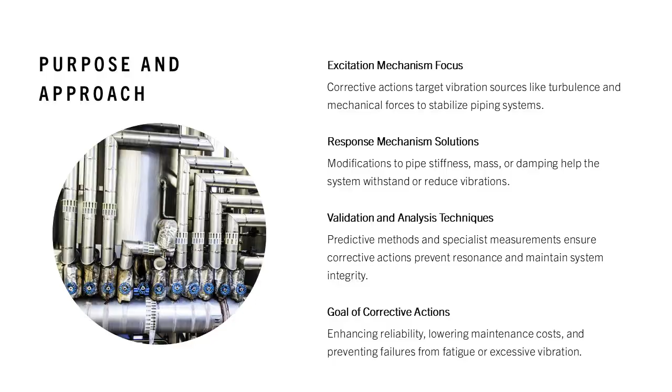These analyses ensure that modifications do not inadvertently introduce new resonance issues or compromise system integrity. In complex systems, multiple excitation mechanisms may coexist, necessitating comprehensive solutions that address all contributing factors. Ultimately, the goal of these corrective actions is to enhance reliability, reduce maintenance costs, and prevent catastrophic failures caused by fatigue or excessive vibration. General pipework corrective actions, support adjustments and contact prevention.

General corrective actions for pipework focus on improving structural support and preventing harmful contact. Tightening clearances on existing supports is a common method to increase pipe stiffness and raise its natural frequency, thereby reducing vibration levels. This approach works because energy levels typically decrease as frequency increases, making the system less susceptible to resonance. However, thermal expansion must be considered to avoid overstressing the pipe during temperature changes.

Another critical measure is avoiding metal-to-metal contact between moving pipe sections and structural elements, which can lead to fretting damage. If contact is unavoidable, inserting wear-resistant or compliant materials between surfaces can mitigate wear. Alternatively, redesigning supports to eliminate contact points is recommended. These actions not only reduce vibration but also extend the lifespan of the pipework by preventing localized damage.

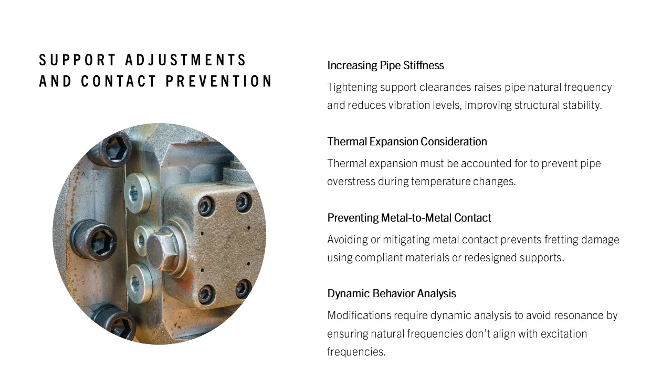Care must be taken when altering support stiffness, as changes can inadvertently align structural natural frequencies with excitation frequencies, creating resonance conditions. Therefore, any modification should be preceded by a thorough analysis of the system's dynamic behavior.

Flow-induced turbulence, excitation control, response modifications. Flow-induced turbulence is a major source of excitation energy in piping systems. Reducing fluid velocity is one of the simplest and most effective solutions, achievable by increasing pipe diameter, adding parallel lines, or adjusting operating conditions. Lower velocities reduce turbulence intensity, thereby minimizing vibration.

Flow smoothing techniques, such as using swept tees instead of 90° tees, minimizing bends, and incorporating long radius bends, further reduce turbulence. Flow straighteners can also be installed to stabilize fluid movement. Valve selection plays a critical role. High recovery valves with streamlined internal contours dissipate less energy, reducing downstream turbulence. Examples include rotary control valves like eccentric plug, butterfly, and ball valves.

Additionally, changing valve trim can help control kinetic energy at the trim exit, ensuring it remains within safe limits for continuous or multiphase flows. These measures collectively aim to reduce excitation energy at its source, preventing excessive vibration and prolonging system life. Let's see this diagram on the left.

This diagram shows how turbulent kinetic energy is distributed across different frequencies, illustrating that most of the energy in a turbulent flow is concentrated at very low frequencies. As we move to the right along the frequency axis, the energy drops rapidly, starting from very high values near 10,000 and decaying in a steep downward trend. The oscillations we see in the mid-frequency range represent the presence of coherent eddies and fluctuating flow structures, but overall, the curve continues to taper off smoothly.

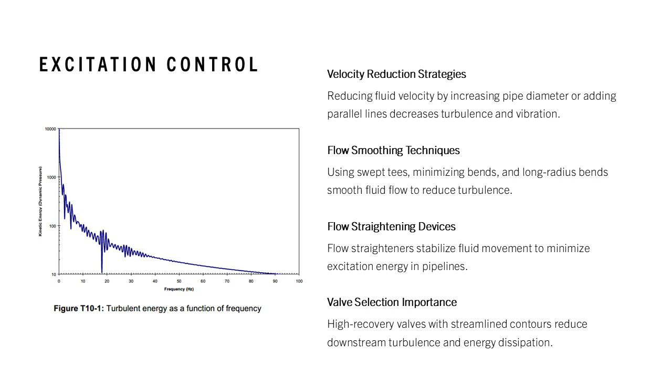When excitation cannot be sufficiently reduced, response-based solutions are applied. Increasing support stiffness raises the pipe's natural frequency, reducing its susceptibility to turbulence-induced vibration. However, thermal growth constraints may limit additional supports. In such cases, viscous dampers provide effective damping across a range of frequencies while allowing thermal movement. Unlike conventional snubbers, these dampers are designed for dynamic vibration control and require specialist advice for proper installation.

Shock arrestors can also be used to resist sudden movements caused by forced vibration, though they require regular maintenance to ensure functionality. Composite pipe wraps offer increased stiffness and damping but should be used cautiously due to limited knowledge of their long-term fatigue resistance. Increasing pipe wall thickness is another option, as it enhances structural inertance and reduces dynamic stress levels. These measures collectively strengthen the pipework's ability to withstand excitation forces, ensuring operational stability.

Let's see this diagram. This diagram compares the vibration response of the pipework before and after a viscous damper was installed, showing a dramatic reduction in velocity across the dominant frequencies. The blue curve represents the system without a damper, where we see a strong resonance peak near 3 Hz reaching over 20 mm per second RMS, indicating significant vibration.

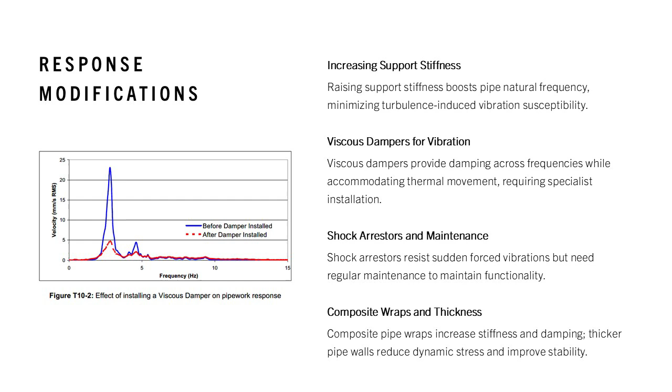After the damper is installed, shown by the red dashed line, the peak at this frequency is substantially suppressed to below 5 mm per second, and similar reductions occur at the smaller peaks around 4 to 6 Hz. Across the entire frequency range up to 15 Hz, the damper effectively lowers the vibration amplitude, demonstrating how the added damping dissipates energy and stabilizes the pipework response. Overall, this figure clearly illustrates the damper's role in mitigating resonance and improving system reliability.

Managing mechanical excitation, response tuning techniques. Mechanical excitation often arises from rotating machinery or connected equipment. One effective corrective action is changing the operating speed of machinery to avoid resonance with pipework natural frequencies. This adjustment must be carefully analyzed to prevent introducing new resonance conditions.

Isolation mounts are another solution, decoupling vibration sources from the rest of the system. These mounts are most effective when installed during the design stage and require a stiff foundation to function properly. Bellows can also be used to break vibration transmission paths, though they introduce additional considerations such as pressure drops and potential turbulence. Each of these measures aims to reduce the transmission of mechanical energy into the piping system, thereby minimizing vibration and associated fatigue risks.

Let's see this diagram. This diagram illustrates how a pipe's fundamental natural frequency changes with both its span length and outside diameter. As shown by the shaded bands, longer spans tend to lower the natural frequency, while increasing the pipe's outside diameter raises its stiffness and therefore increases the natural frequency. For example, pipes with long spans in the upper shaded region fall near 1 Hz, indicating they are more flexible and susceptible to low-frequency excitation.

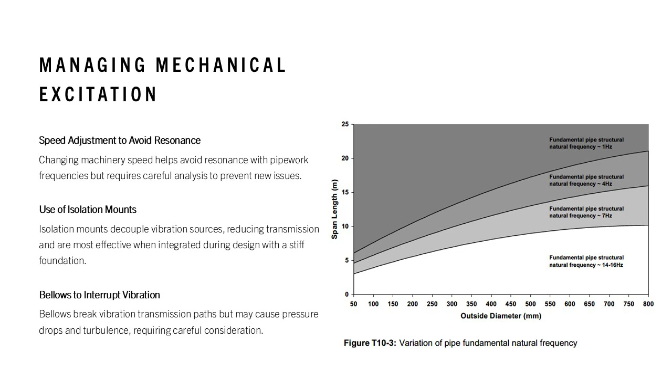Response tuning involves altering pipework characteristics to shift natural frequencies away from excitation sources. This can be achieved by adding stiffness or mass to the pipe, depending on whether the goal is to raise or lower the natural frequency. For example, clamps or additional supports increase stiffness, while added mass lowers frequency. Modifying span length or pipe diameter also influences natural frequencies significantly.

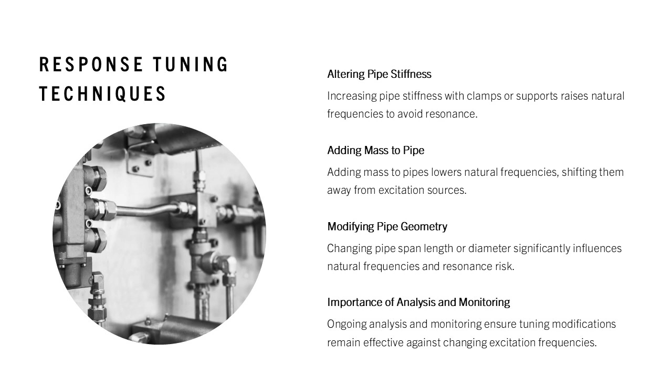These changes must be carefully planned to avoid coinciding with harmonic excitation frequencies, which could create new resonance issues. In systems with variable excitation frequencies, caution is essential, as operational changes may reintroduce resonance. Proper analysis and monitoring are critical to ensure long-term effectiveness of these modifications.

Pulsation and acoustic issues, reciprocating equipment pulsation, high-frequency acoustic excitation. Reciprocating pumps and compressors generate pulsations that can excite acoustic resonances in piping systems. To mitigate this, operating speeds should avoid coincidence with acoustic natural frequencies, typically by maintaining a plus or minus 20% separation. Adjusting line length can also shift acoustic modes, reducing resonance risk.

Pulsation bottles and nitrogen precharged dampers are commonly used to attenuate pressure fluctuations, though their effectiveness depends on proper design and maintenance. Orifice plates and acoustic absorbers, such as tuned side branches, provide additional damping for specific frequencies. These measures aim to control pulsation energy and prevent excessive vibration in connected pipework.

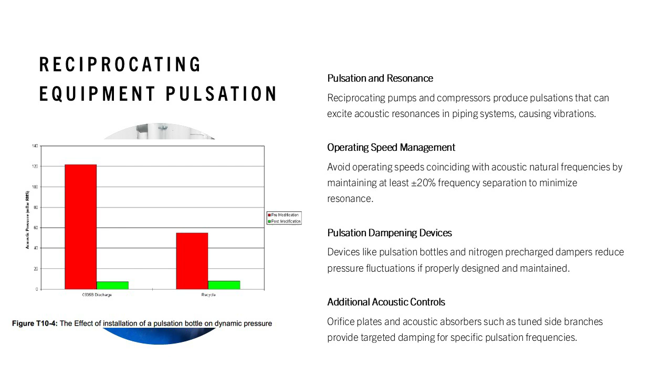High-frequency acoustic excitation poses a significant fatigue risk, particularly at circumferential discontinuities. Reducing mass flow rate or outlet Mach number can lower acoustic energy at its source. Using low-noise valve trims, such as multi-stage pressure drop designs, further mitigates noise generation. Increasing downstream pipe length provides natural attenuation, reducing energy levels before reaching sensitive locations.

Structural modifications, including increasing wall thickness, removing discontinuities, and adding stiffening rings, enhance resistance to high-frequency stresses. These actions collectively reduce the likelihood of acoustic fatigue failures and improve system durability.

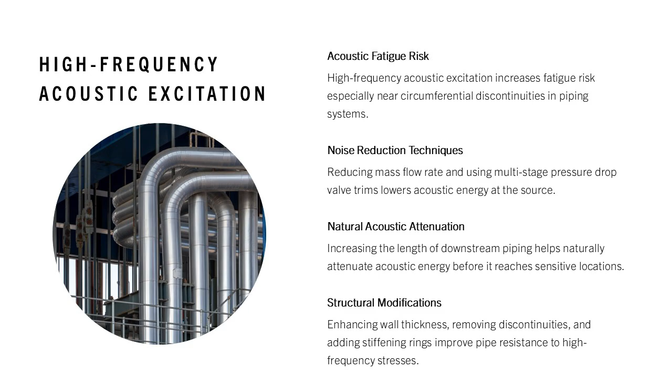Surge control, cavitation and flashing mitigation. Surge events occur during rapid valve operations or pump startup/shutdown, causing sudden changes in fluid momentum. Corrective actions include slowing valve closure times, using soft start pumps, and installing surge relief devices such as fast-acting valves or bursting discs. Surge tanks can also be employed to absorb pressure waves and reduce transient forces.

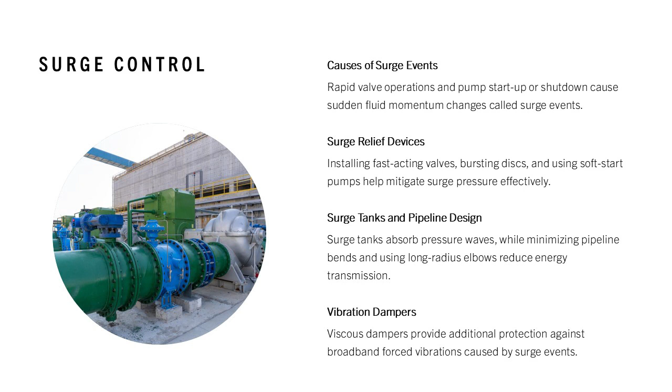Minimizing bends and using long-radius elbows further decreases energy transmission to the pipework. Viscous dampers provide additional protection against broadband forced vibrations associated with surge events. Cavitation and flashing occur when local pressure drops below the fluid's vapor pressure, leading to vapor bubble formation and collapse. These phenomena can cause severe vibration and pitting damage.

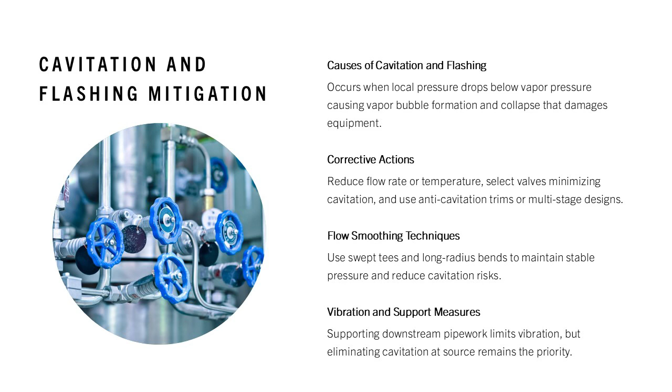Corrective actions include reducing flow rate or fluid temperature, selecting valve types that minimize cavitation risk, and using anti-cavitation trims or multi-stage pressure drop designs. Staging pressure drops across multiple valves or orifice plates further reduces cavitation potential. Flow smoothing techniques, such as using swept tees and long-radius bends, also help maintain stable pressure profiles. Supporting downstream pipework can limit vibration effects, though eliminating cavitation at its source remains the priority.